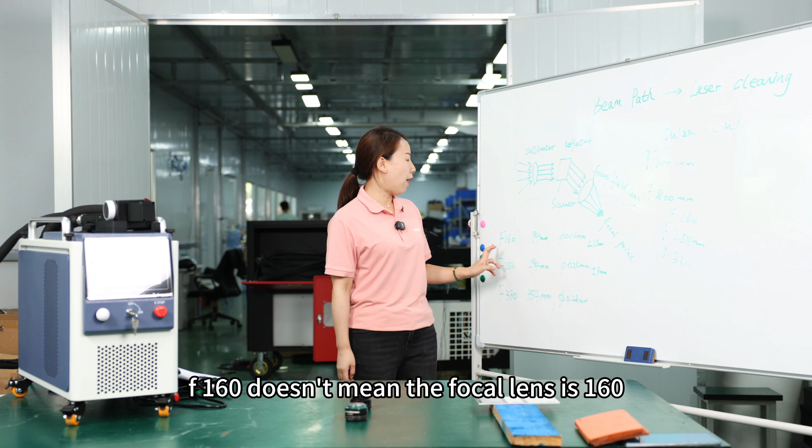f160 doesn't mean the focal length is 160. If you put more energy, it's easily burned, which actually changes the real focal point distance.

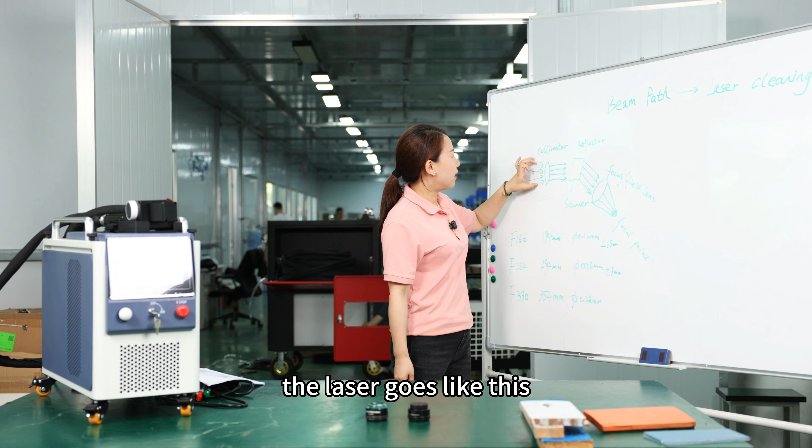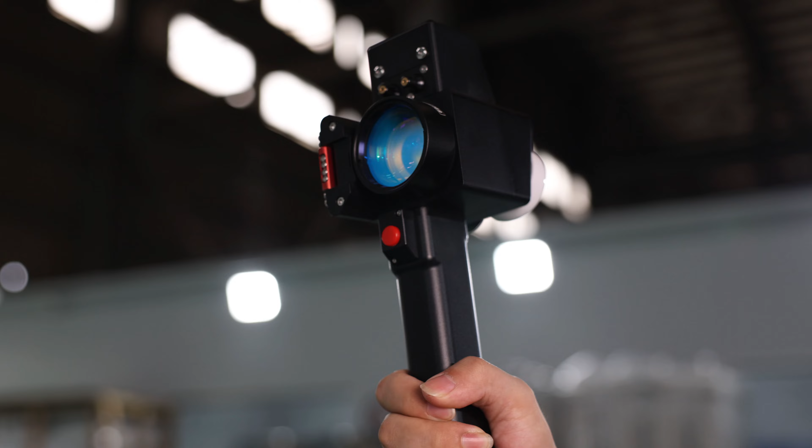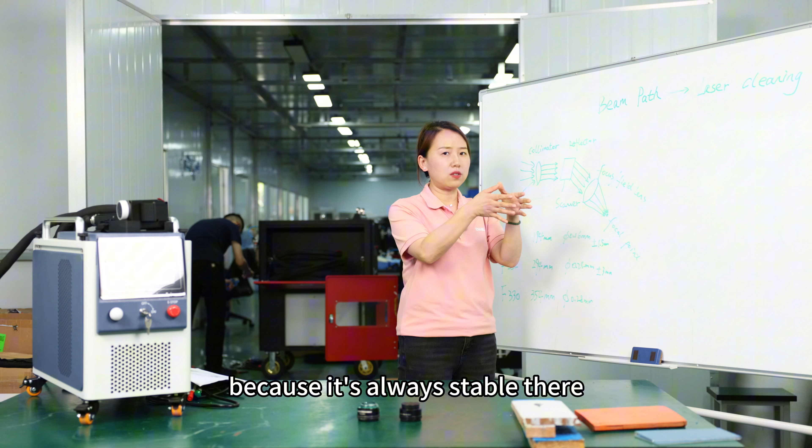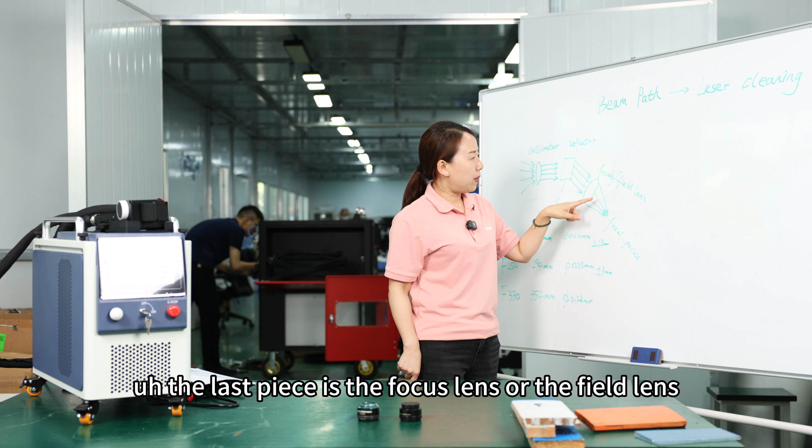So today we're going to talk about the beam path's effect on laser cleaning. After the laser comes out from the source, it goes in many directions. First, the lens is the collimator. After the collimating lens, all the optical beams become very parallel. Then there's the reflector lens, held by a scanner, normally in laser cleaning applications. In laser cutting or welding applications, you need a very small beam with high density at the focal point, so you don't need this reflector because it's always stable there. For laser marking or cleaning, you need the beam to move really fast, so the laser beam goes through this reflector lens. After that, the last piece is the focus lens or the field lens.

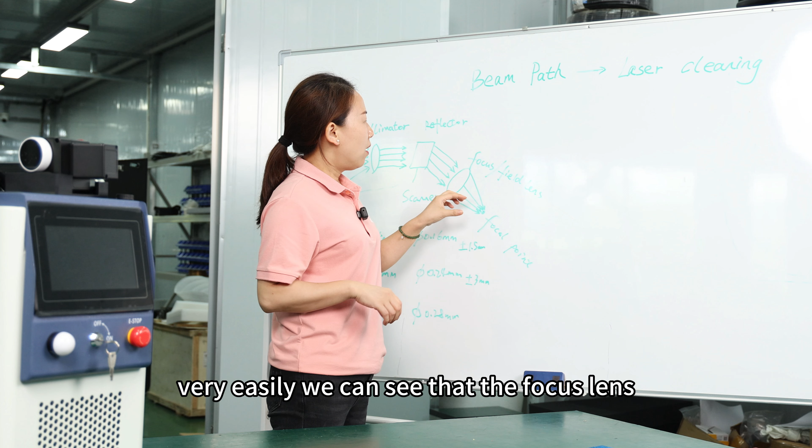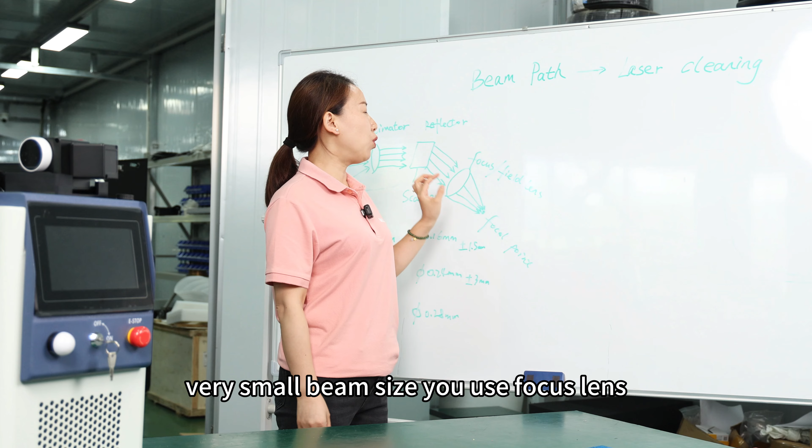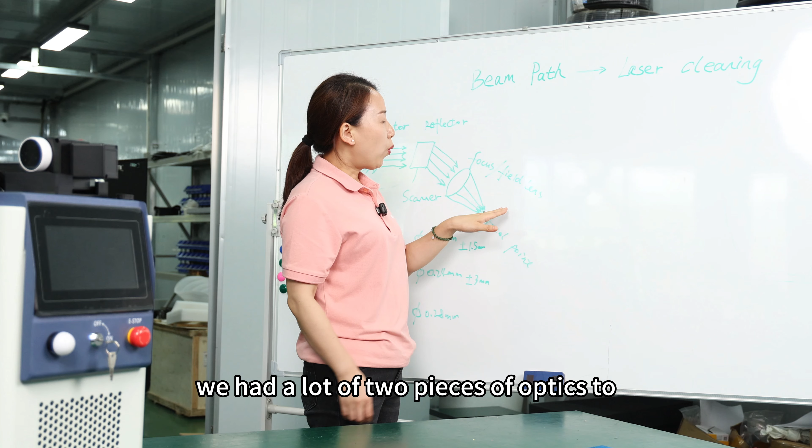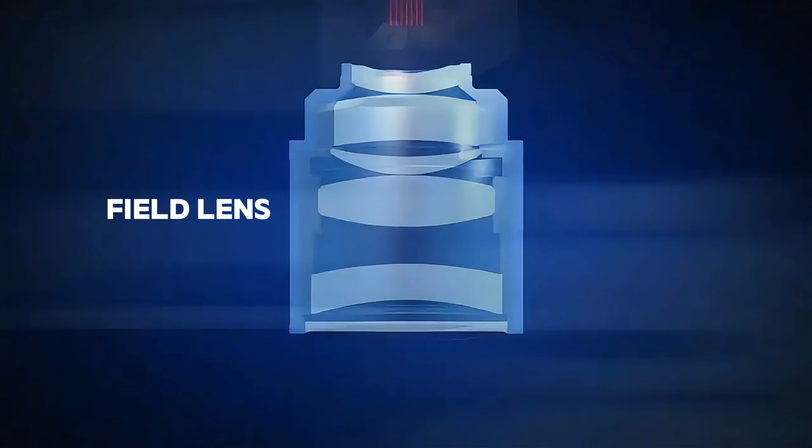Today we're going to compare the difference between focus lens and field lens, and different sizes of field lens. The focus lens focuses the laser beam to a very small point, as I said before. For cutting and welding applications, you need a very high density beam, a very small beam size, so you use a focus lens. When we use the scanner to move the laser beam across a large field, we call it a field lens, because besides focus, we add two more pieces of optics to make the laser focus evenly across the field—no matter in the center or in the corner—to have equal beam quality. So we call it the field lens.

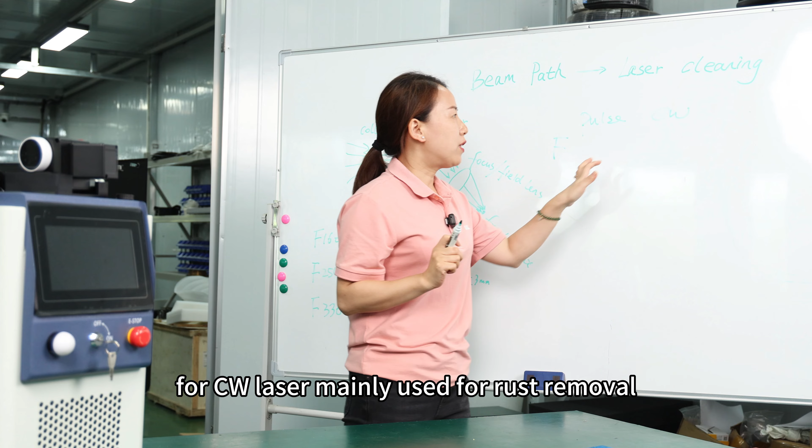For focal lenses, we have different sizes, named by the focal length. Generally, for pulse lasers, we use a field lens. For CW lasers, we use a focus lens. Why? Because CW lasers are mainly used for rust removal, and rust is very easy to remove, so you don't need to guarantee equal quality across the whole surface. So you can use a cheaper option with a focus lens, and normally it's more portable and smaller.

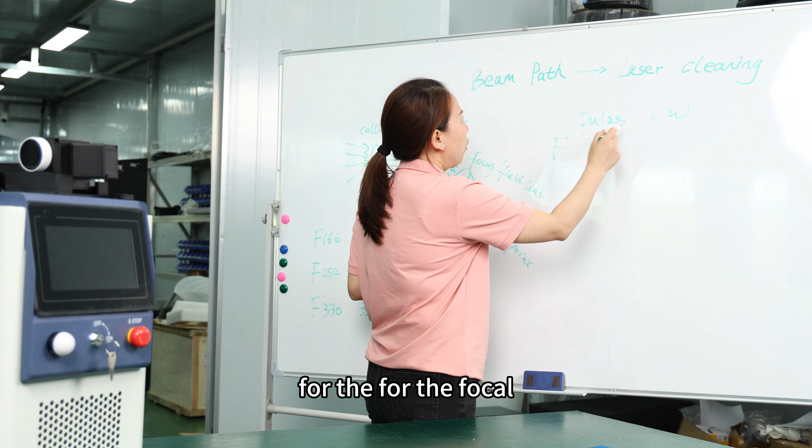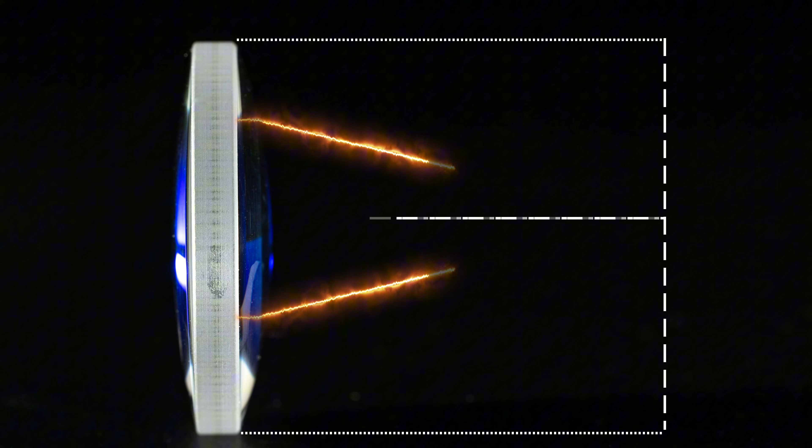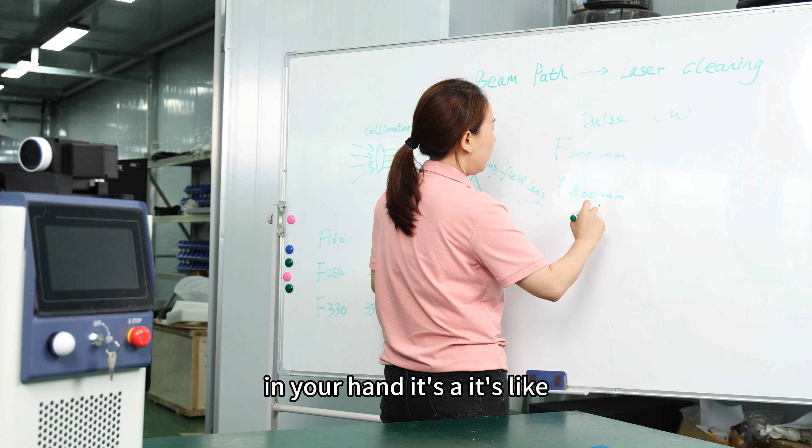For the focal lens sizing, we name it f300, meaning the focal length is 300 millimeters, or at maximum up to 800 millimeters for very long focus. For field lenses, we normally have the number on hand. For example, this ordinary one is f254, or smaller at 160, or bigger at 330.

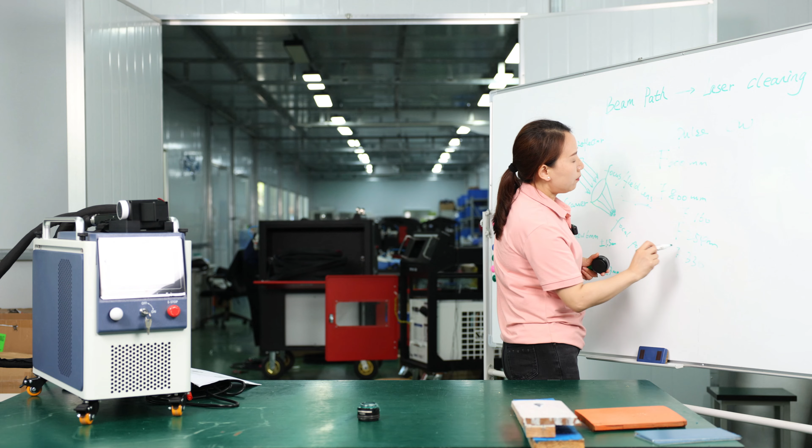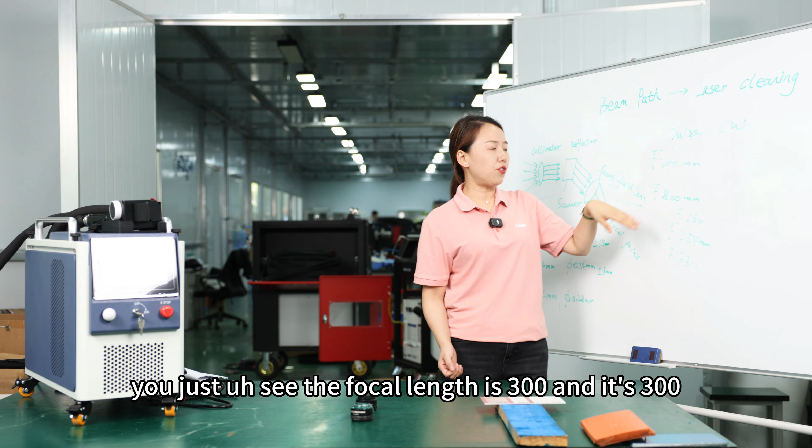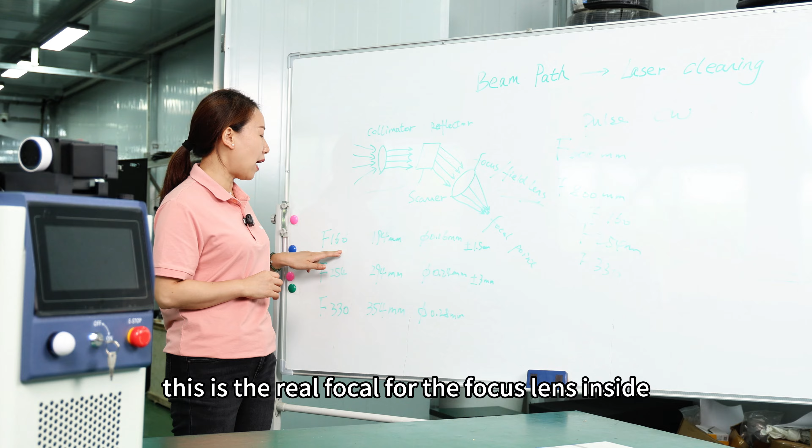So we're going to talk about the difference between different focal lengths. For focus lenses, it's very easy—you just see the focal length is 300, and it's 300. But for field lenses, it's quite complicated. When we call it f160, it doesn't mean the focal length is 160. Actually, you get 194, which means the real focal point is 194 millimeters from the lens to the surface. This is because for field lenses, apart from the focal—this is the real focal for the focus lens inside—we add another two pieces of optics, which actually changes the real focal point distance. At this distance, the focal point gives you a beam diameter of 0.16 millimeters.

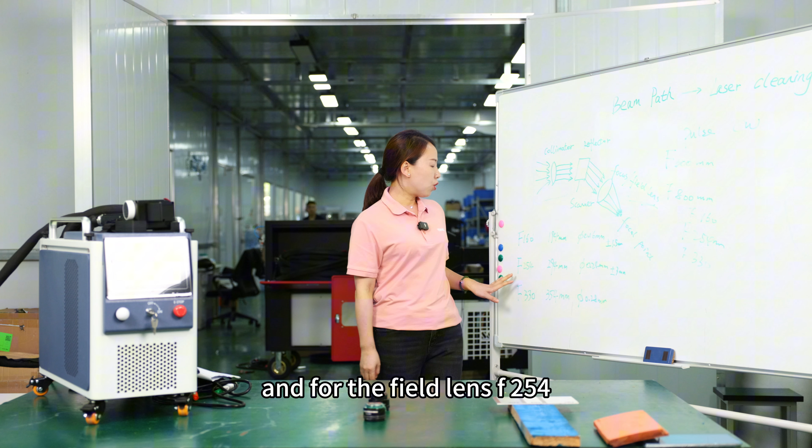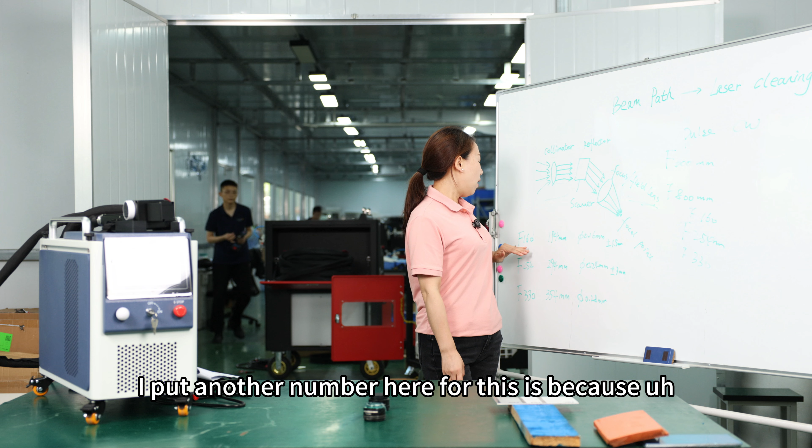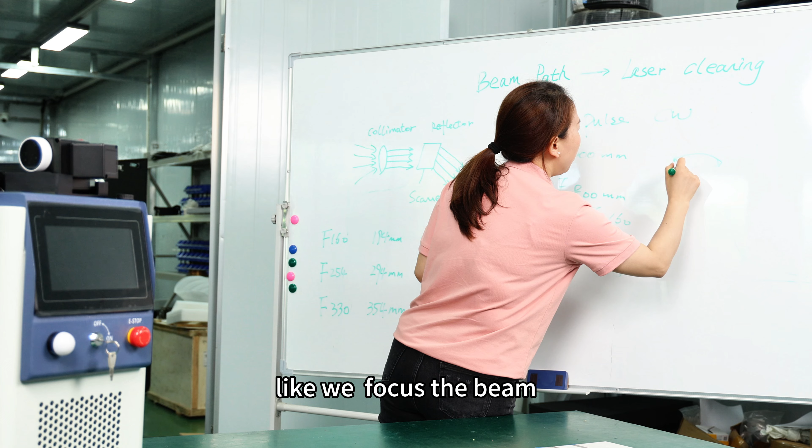For the field lens f254, the focal distance is 294, and the beam diameter is 0.24. I put another number here because, for the smallest field lens focal points, I explained in the last episode that the focal point is not theoretically a single point, but actually a distance. When we focus the beam, there is a point, but it's actually not a point—it's like this, there's a distance. We call it the beam width, or the focal width.

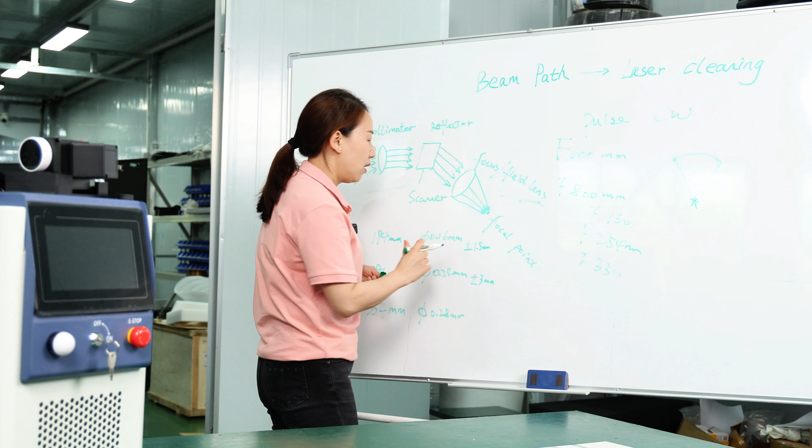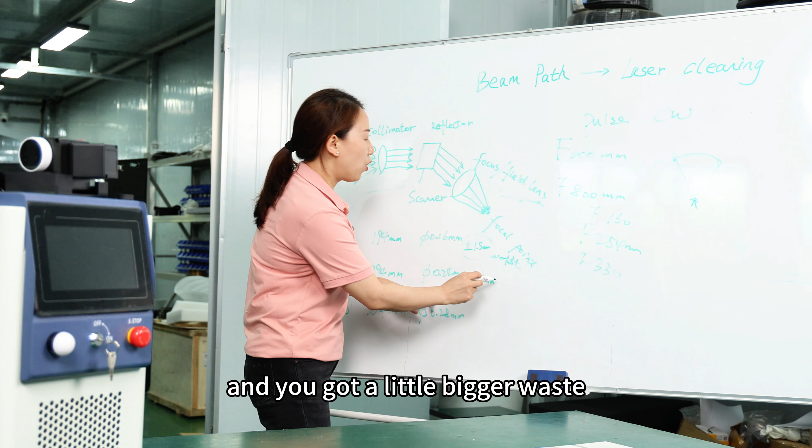So the width here is smaller, and for larger beam you got a little bigger width, and this one is even bigger. This will affect the cleaning effects, which we'll show when cleaning different materials.

First we'll show aluminum alloy, because it's very difficult to clean. It needs very high density, high power. Then we'll compare on wood, which is also critical for laser cleaning. If you put more energy, it's easily burned, and if you don't have enough energy, it doesn't clean the paint. So on these two materials, I think it's a very good way to show how these different field lenses work.

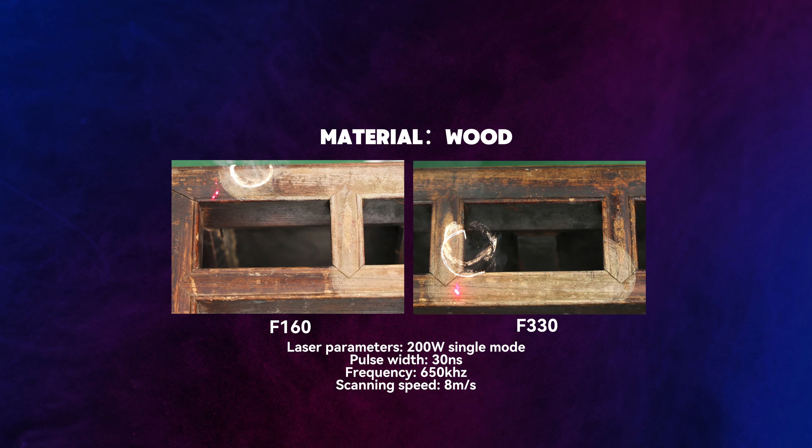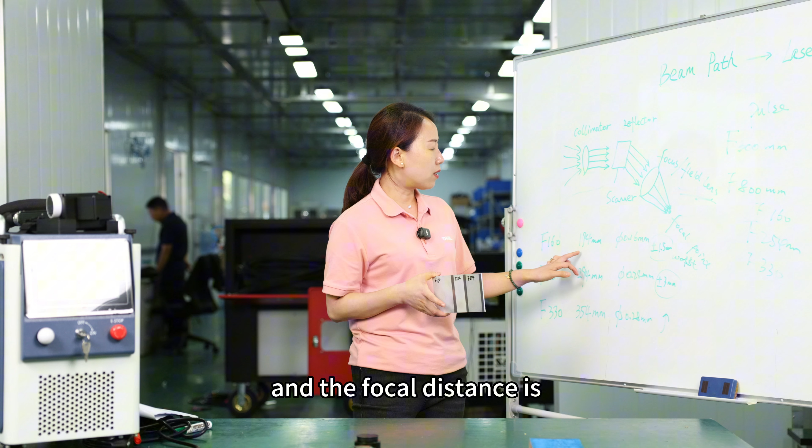Okay, so first we see the difference of all these field lenses cleaning aluminum, because aluminum is very difficult to clean. For this we use the smallest field lens, F160, and the focal distance, and this beam is very small, so the density is very high.

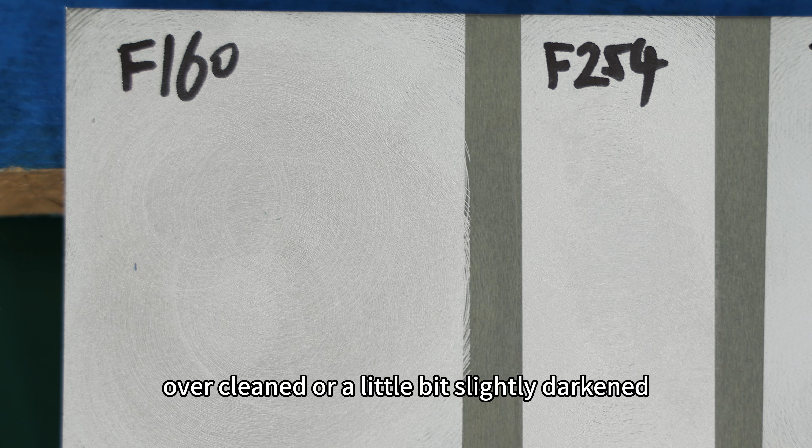In the center it's almost about 2,700 watts. So you see the cleaning surface is a little bit over-cleaned, or slightly darkened, and it's a little bit hard on the base material.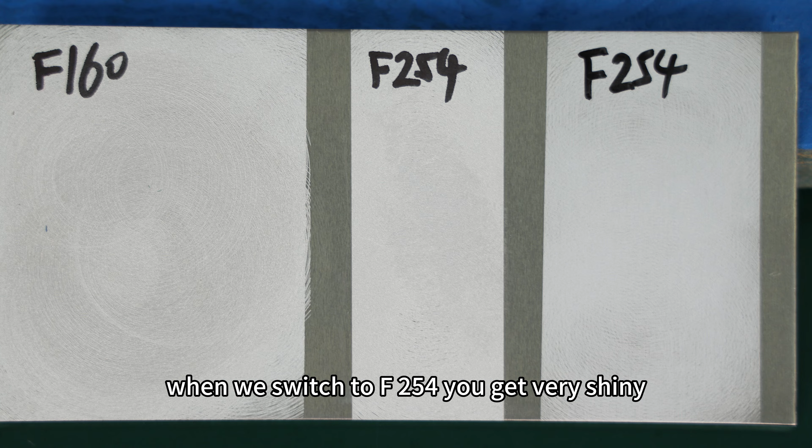When we switch to F254, you get very shiny cleaning effects. You take off the oxidation layers and all the aluminum base material is disclosed, so it looks very nice.

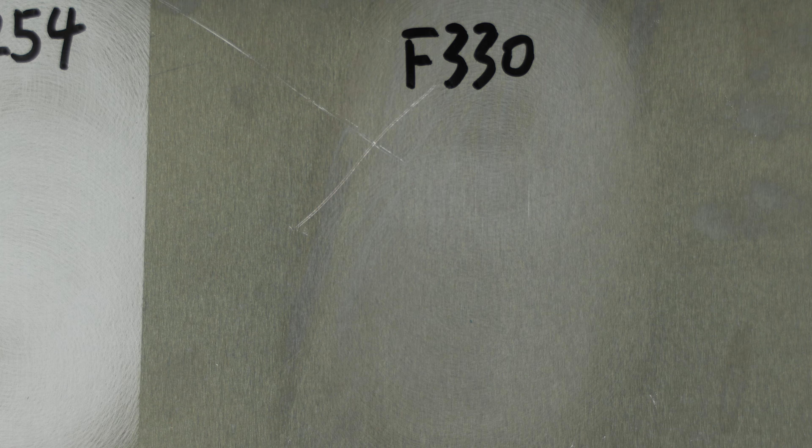And with this, the largest one, focal 330, you see that because the beam is very big and the center of the beam's density dispersion is very small, less than 1,000 watts, it cannot take off the oxidation.

Now we talk about the difference of field lenses cleaning wood. First we try with F160, and you'll see that because it's too much density and power, it's a little bit overburned, a little bit carbonized for the wood.

Then you can switch to F330, which we think is very nice for cleaning wood. You get very equal cleaning effects, because for wood you need very gentle working of the laser. With this 330 you get a very large beam, giving very gentle effects on the wood.

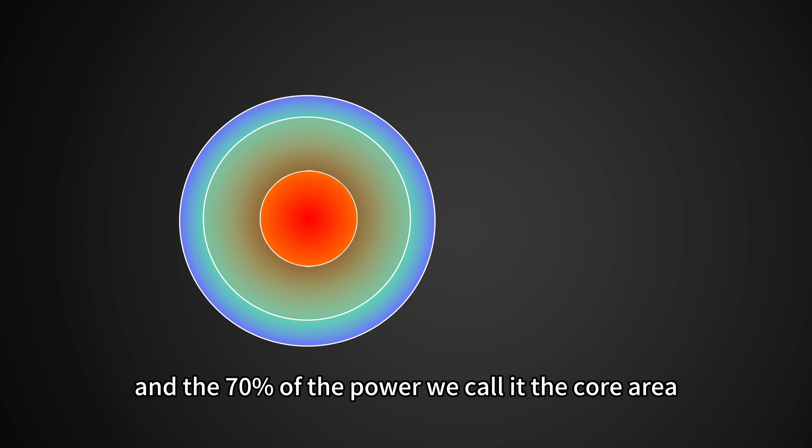So here comes the scientific explanation of the theory. First we name the definitions. We call 86% of the power the full beam size, and 70% of the power we call the core area, which in the picture is the red and yellow. The rest we call the outer part of the beam.

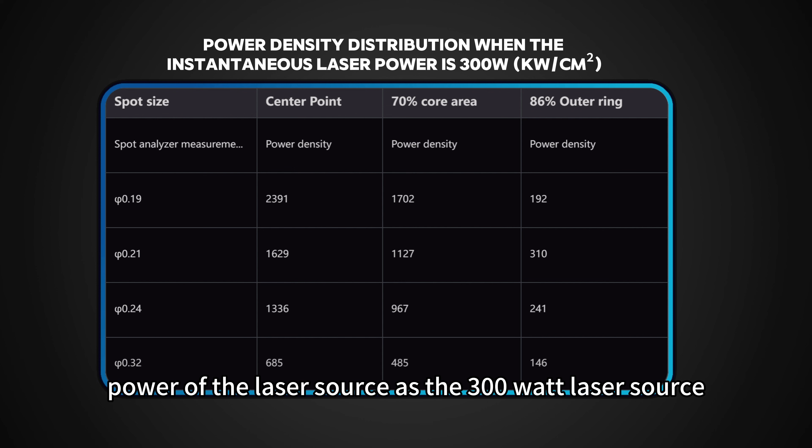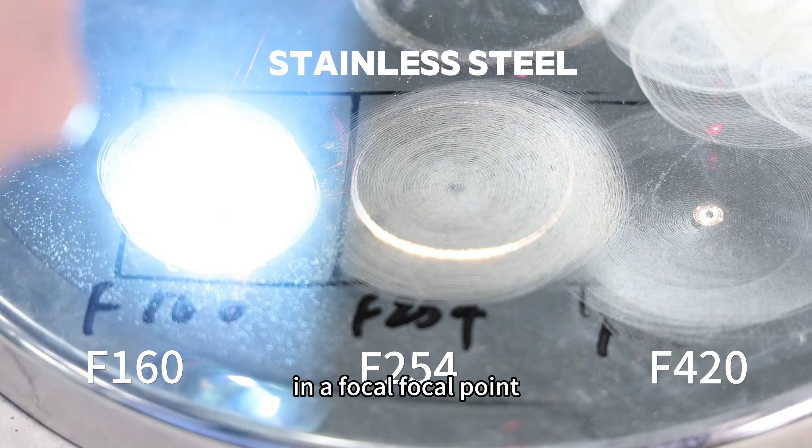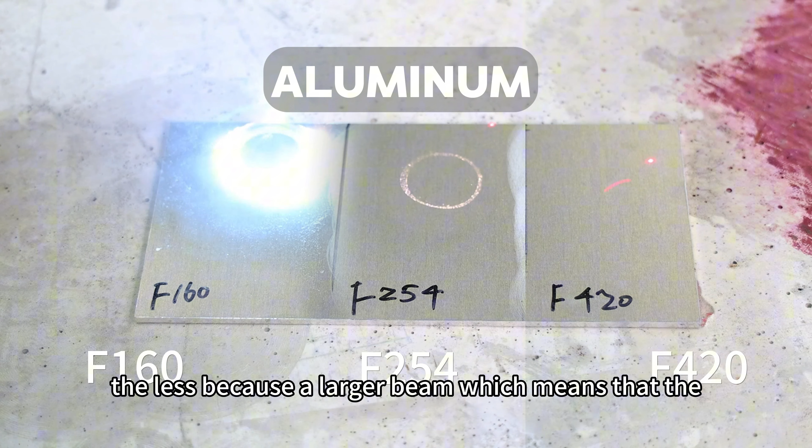For a 300 watt laser source, the energy distribution goes like this in the chart, and from that we got the energy distribution curve in the picture. We find that the larger the field lens focal length, the larger beam you get at the focal point, which means the power density is smaller, and especially in the core area, the power density dramatically lowers.

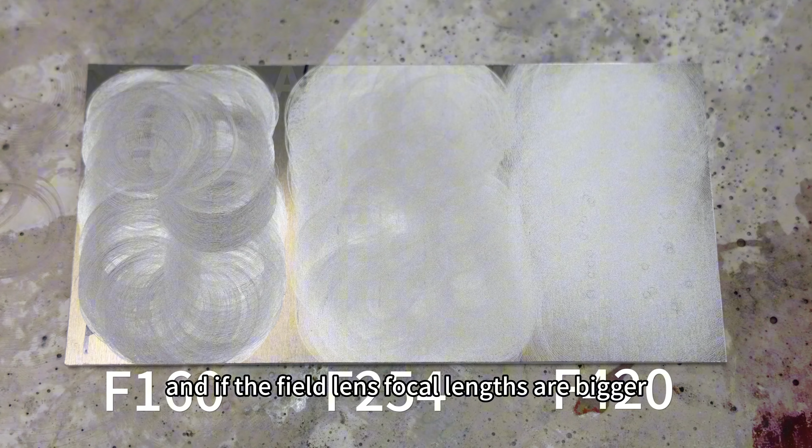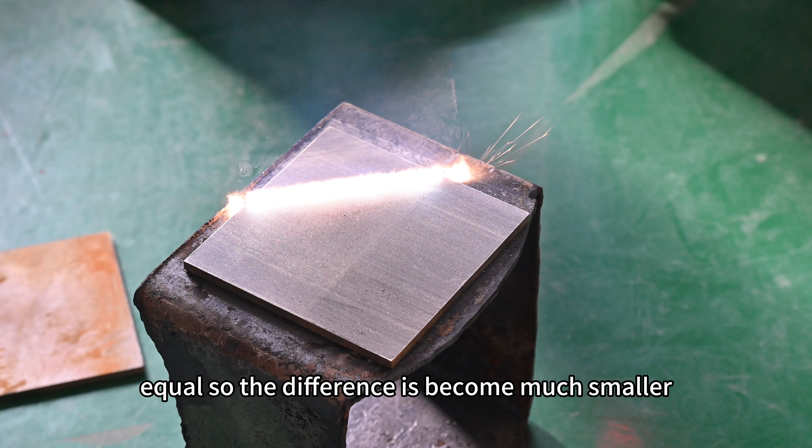That's why when we switch to field lens F330, we cannot clean the oxidation of the aluminum. But if the field lens focal length is bigger, the energy distribution in the full beam size is very equal, so the difference between the core area, main area, and outer area becomes much smaller, giving very equal cleaning quality.

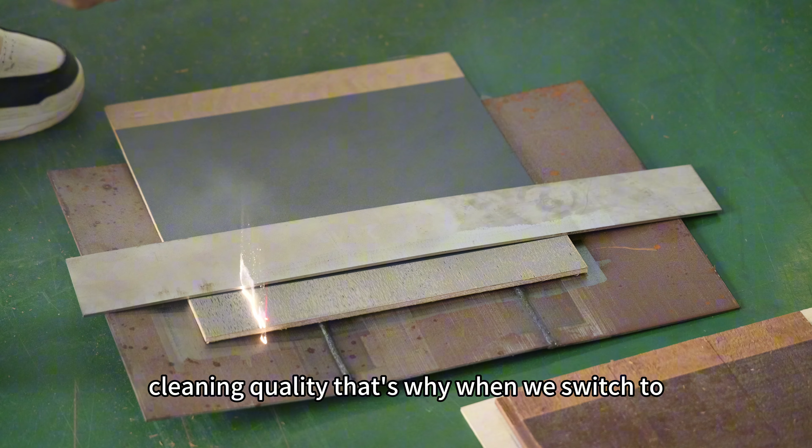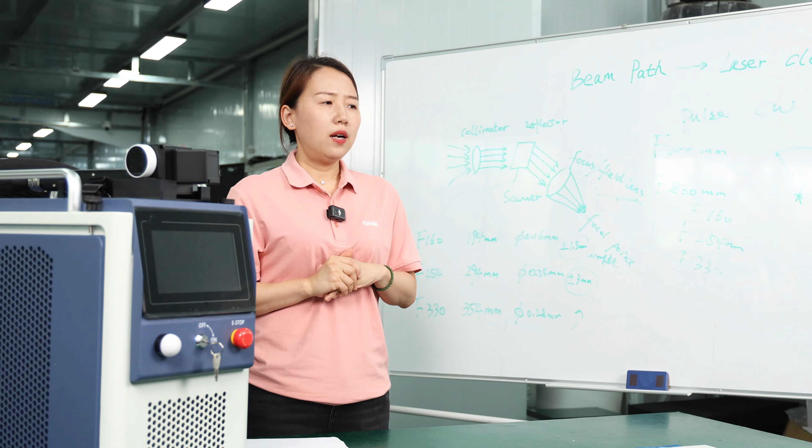Okay, so that's all about today. In the next episode, we're going to go deeper, because now we have a new version of long-distance cleaning, which I think we launched last year. This mainly focuses on stainless steel cleaning after welding. Many customers feedback to us that even with long-distance cleaning, you still see color difference after cleaning, and some customers don't accept this. So we kept working on this, and now we're coming up with a new version that minimizes the effects on the surface of stainless steel. Our engineer will bring us deeper insight on this technology.